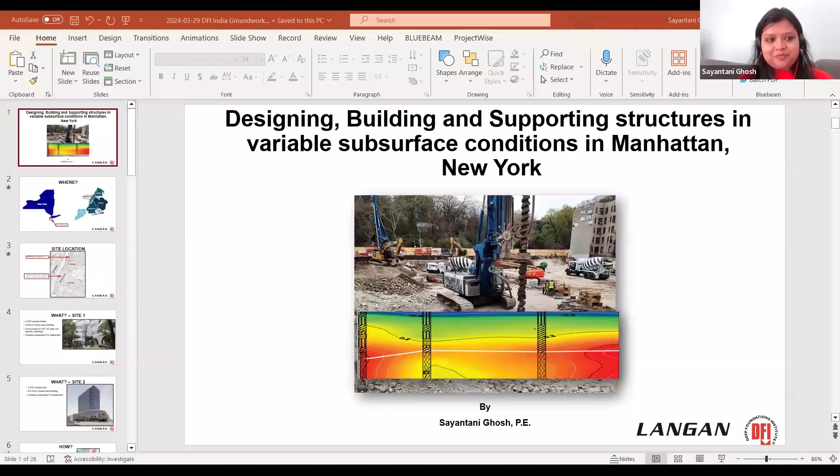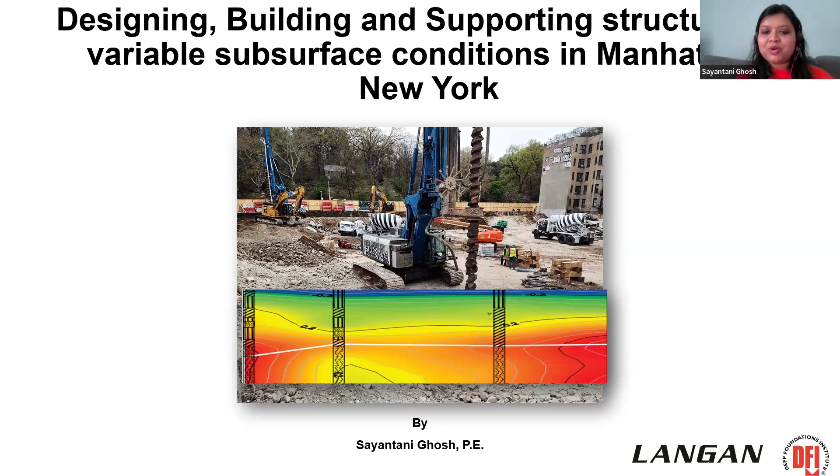We're going to talk today a bit about constructing and supporting structures in the variable subsurface conditions in Manhattan, New York. One of the things we usually hear a lot as geotechnical engineers whenever we talk to clients or developers is, you are in one city for such a long time, so how come you don't know the subsurface conditions? So part of today's discussion will be about how important it is to understand the subsurface conditions of a particular job site, to appropriately design and also work with contractors to have a successful project.

So we're going to talk about two of the projects in New York City, which is one of the cities in New York State. There's a lot of confusion sometimes that New York is a huge state, and New York City is just one of the cities in the state. New York City is divided into 5 boroughs: Manhattan, Bronx, Queens, Brooklyn, and Staten Island.

Moving on to Manhattan, many of you would probably be aware of Central Park. The site American Museum of Natural History, Gilder Center, is right next to Central Park in Manhattan. The other site that we worked on was Uptown Manhattan, at 4650 Broadway.

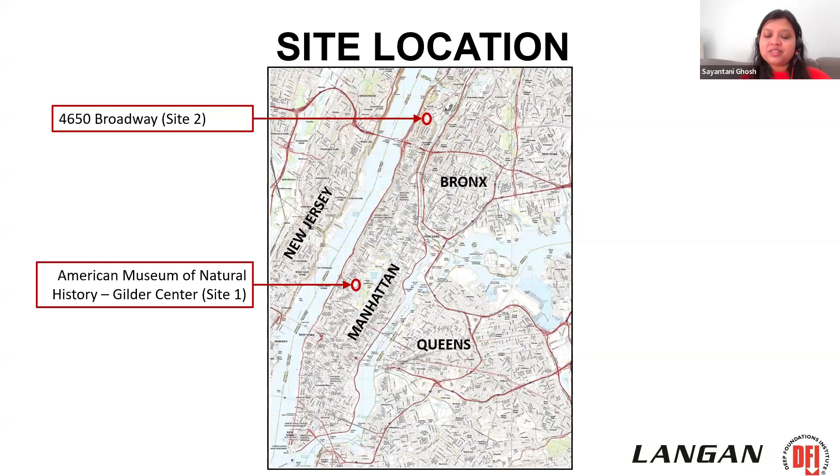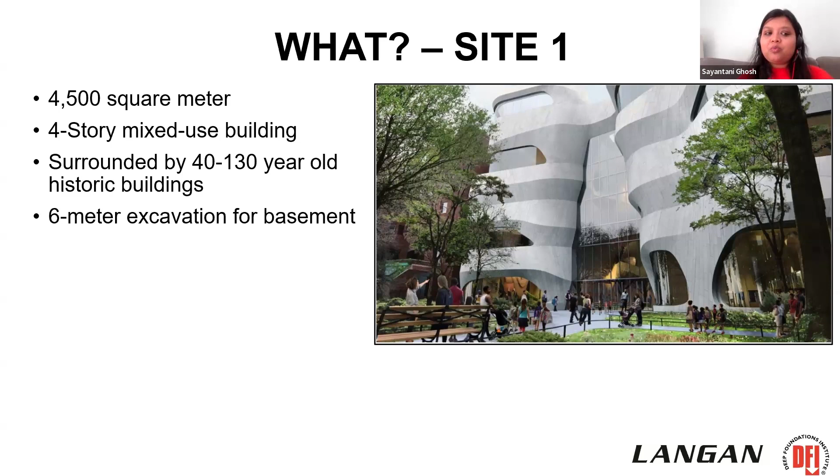So what are we building? Taking a step back from any name of the project or where it is: for site 1, it's a 4,500 square meter site, a 4-story mixed-use building. It's surrounded by 40 to 130-year-old historic buildings. It involved 6-meter excavation for the basement construction.

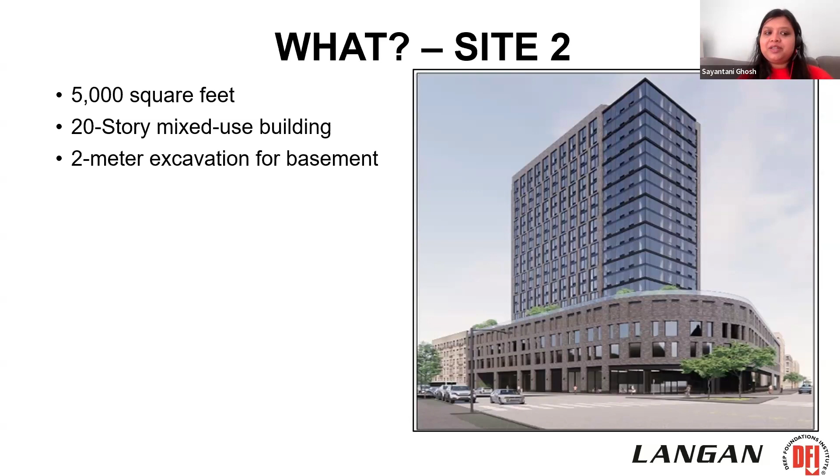Second site is 5,000 square meter—apologies, it's still in feet, so apologies about that because we're coming from the US to presenting in India, so this is meant to be meters. It's a 20-story mixed-use building with a 2-meter excavation for the basement.

So how do we get there? How do we achieve the goals of the projects? Wherever the site is, irrespective of the location, we would usually take a step back and try to understand what are the available geology maps in the region.

What are the historic maps saying about the history of a region? What was on site in the past? The local authorities are very critical—they play a very important part in the success of a project because they hold the information of these historic maps, what local compliance issues have to be followed, what code compliance needs to be followed, what approvals are needed. So the local authorities need to be on board to move ahead on the project.

What existing geotechnical investigation reports are available for the job site or in its vicinity? What information is available for the adjacent structures, like how tall are the buildings, what is the depth of the foundation, how many levels of basements are there, and how close are they to our job site?

Site visits, they are the most important according to me. It's very, very important to have site visits very early on a project to understand the locality, the region, the site grades. It's absolutely critical for the project.

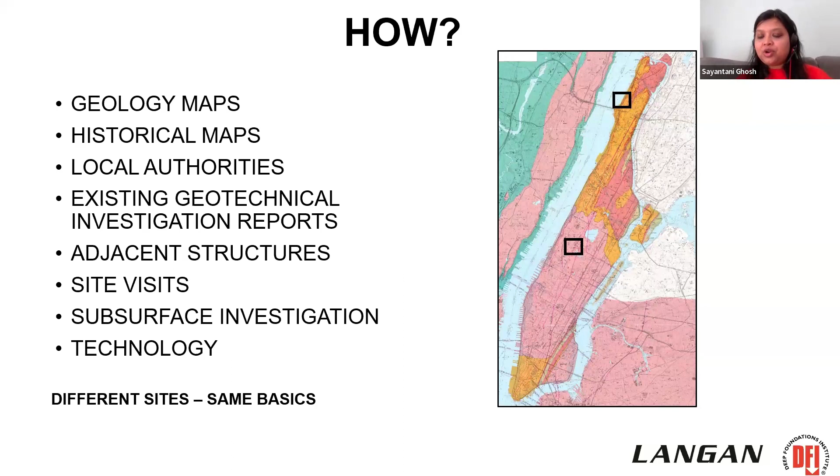Now I'd like to go a bit project-specific on the Gilder Center, which I'm referring to as site 1 for simplicity right now. The most critical part of this job was that it's a landmark site in a historic district. It was surrounded by buildings built ranging from 1877 to 1929. These were really, really old buildings with very old foundations, and there was no way we could touch them.

There were very stringent restrictions on any sort of damage that could occur to these buildings. And I'd like to flag it's an operational museum, so for the entire time of construction, the museum was operational. There were visitors, guests, and ongoing shows, so it was a full-on operational museum along with an active construction site going on adjacent to it.

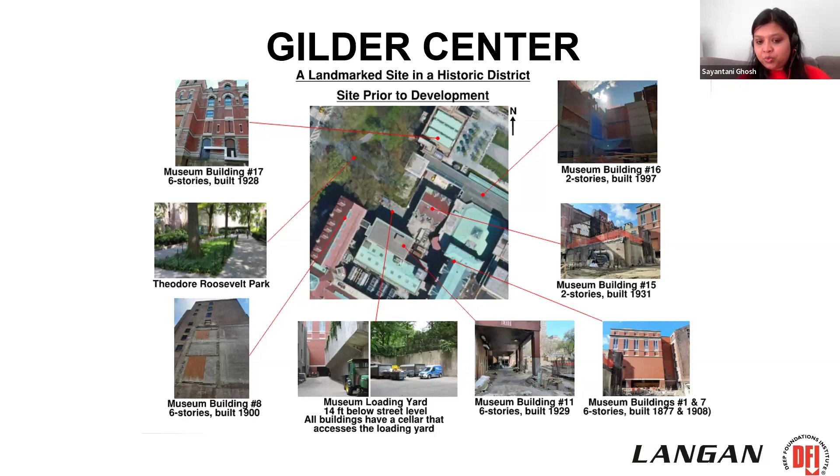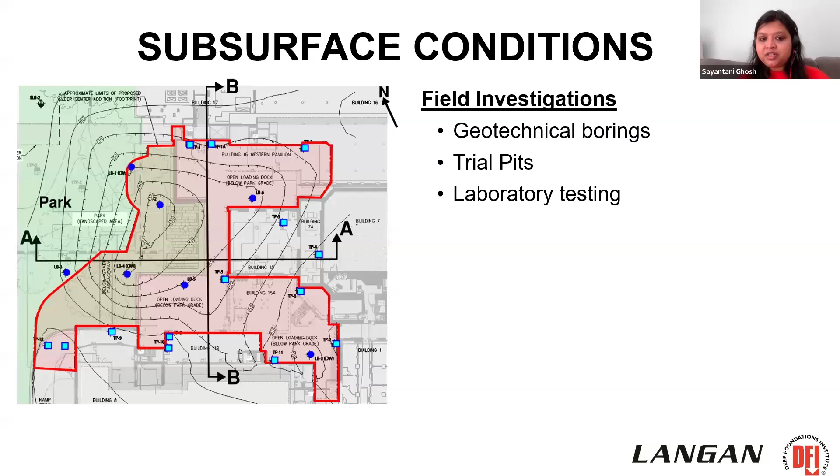So how did we start the project? We started with planning a field investigation, which comprised geotechnical borings, trial pits, and laboratory testing. Based on this project, we had all these adjacent structures, but unfortunately there was no information available from local agencies or any websites with building information where we could find the existing foundation of any of these buildings. So we prioritized trial pits on the job rather than doing tons of boreholes, because it was very important early on to understand the subsurface conditions where the existing footings are bearing.

A high level overview of the subsurface conditions on the east-west subsurface profile: we found that the site is underlain by fill, which was underlain by a clay zone, and underlain by a combination of competent bedrock, sand, and decomposed rock. So you can see it was highly variable. We could not state that the site is going to bear uniformly.

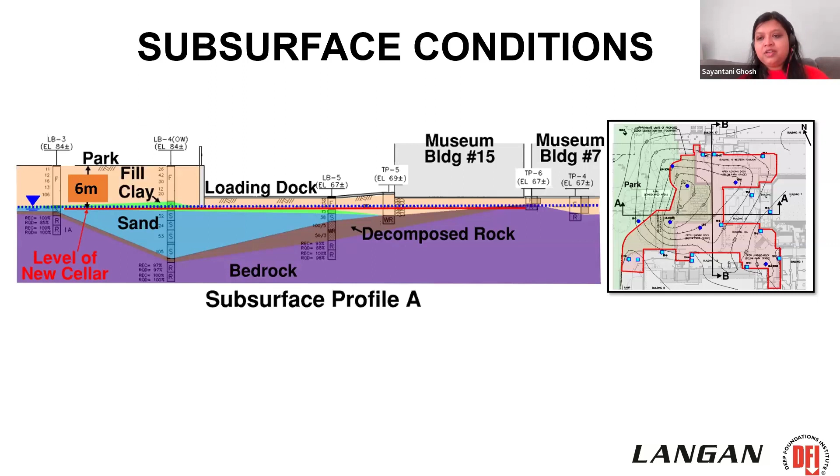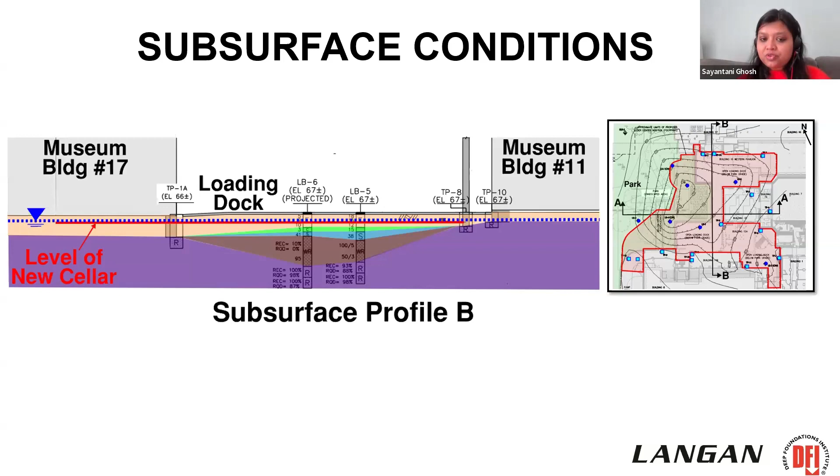The red line here shows the level of the proposed new cellar level, and that bearing level was going to range from competent bedrock to sand to decomposed rock. Moving on to the north-south subsurface profile, it was very similar. We understood that the existing foundations were going to bear on either decomposed rock or bedrock.

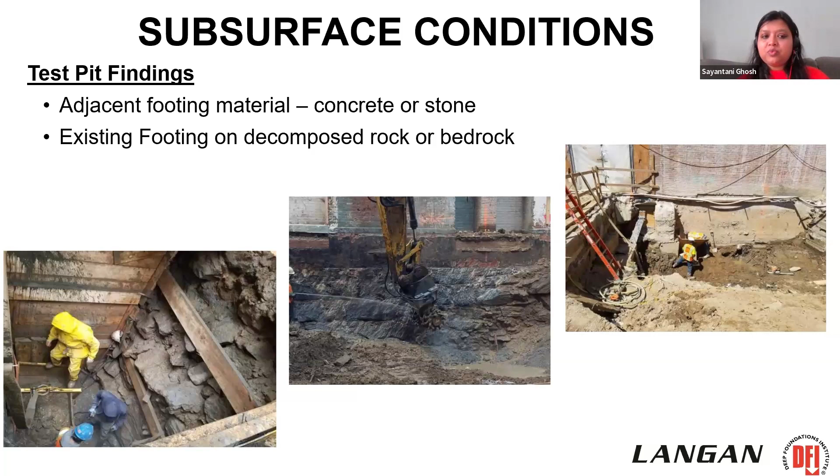These are a few pictures from our test pits while we were exposing the existing foundations. The adjacent footing material was either concrete or stone, and the existing footing, as I mentioned earlier, was bearing either on decomposed rock or on bedrock.

So the support of excavation was very, very critical on this job. Moving from the east side to the north of the site, the buildings on the north and east side were bearing on competent bedrock to borderline decomposed rock. We had to do concrete piers down 6 meters to bear the new foundations, which was done with the concrete piers onto competent bedrock.

As you can see, the blue zones are showing active utilities. These active utilities had to be underpinned and supported, and they were really very high intensity boilers. So a lot of safety procedures had to be put into place on site for the safety of the workers and engineers working alongside active utilities.

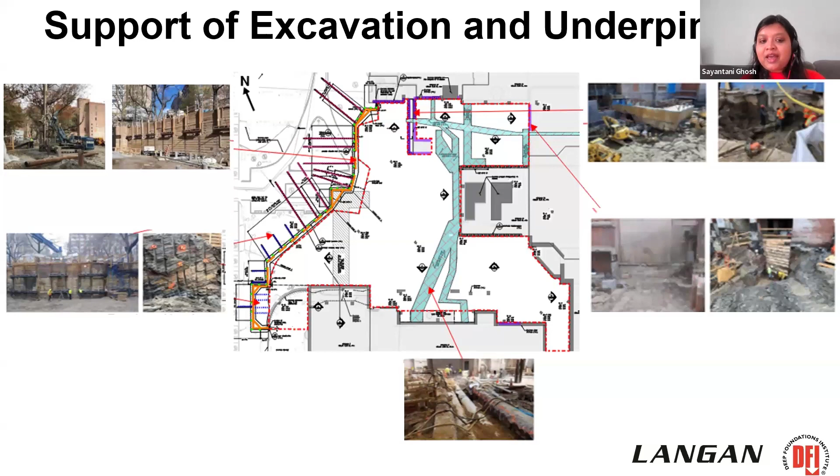If we move to the west side, we had a soldier pile and lagging system on varying subsurface conditions, because the southern part of the site had the rock level way higher than the northern part. So the level and tier of bracing were determined as we were excavating on site, moving from south to north, depending on where we were encountering bedrock.

The proposed new foundations were a combination of shallow and deep foundation. It had shallow footings bearing on either 4 TSF sand or 20 TSF bedrock, depending on the column loads received from the structural engineer. The deep foundations were caissons with sockets into bedrock.

The key considerations for the job, during both design and construction phases, were that we had to limit the differential settlement to a limit of 1/2 inch, and the total settlement and deflection was not allowed to exceed 1 inch.

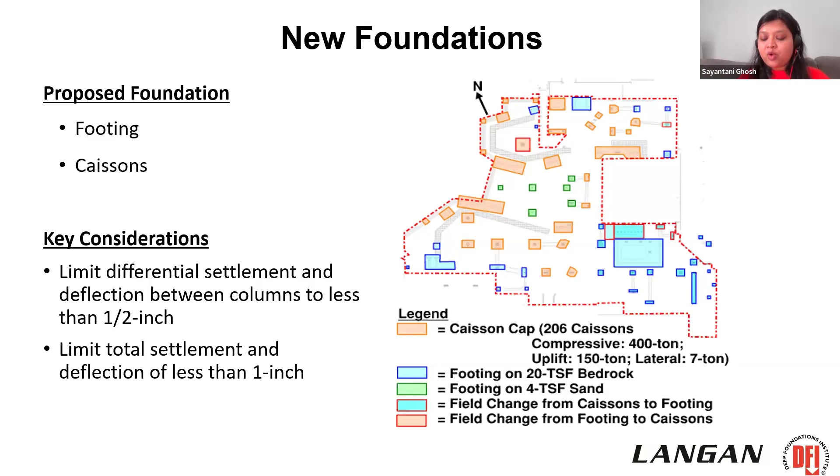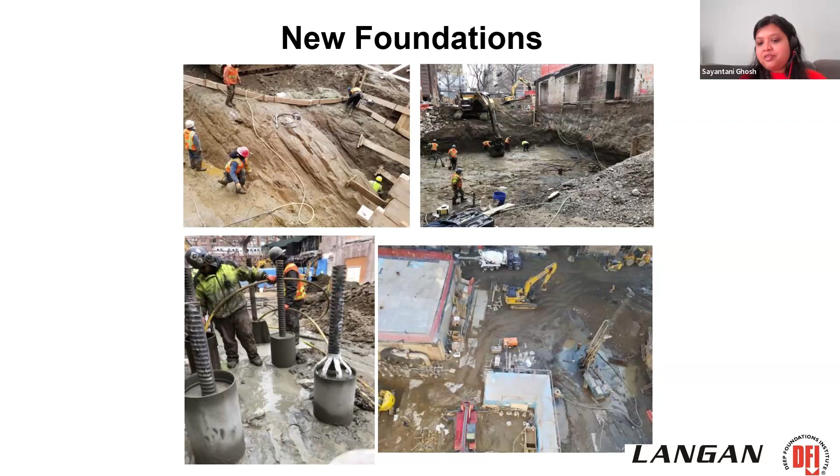On the other side of the site, parallelly, there were caissons being constructed. As you can see in the picture, it was an extremely active site with almost 5 or 6 different types of construction activities or drilling machines ongoing, with active utilities running as well.

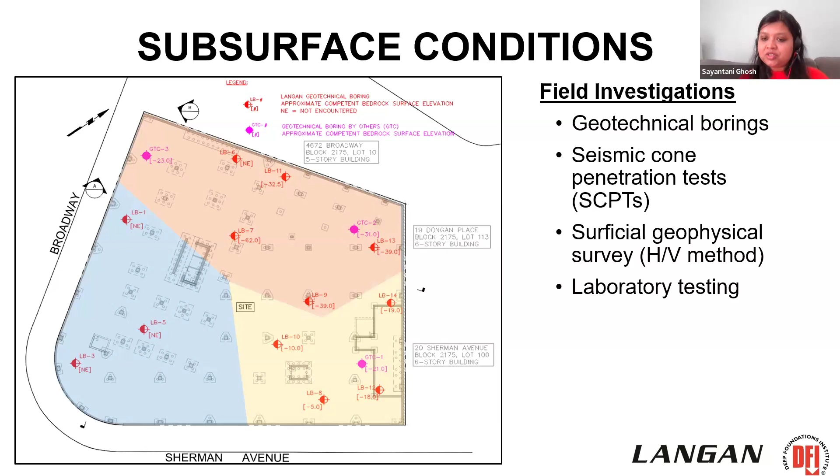Moving on to the second site, which is 4650 Broadway, the same principles of planning and very appropriate, tailor-made field investigation for the site, which comprised geotechnical boreholes, seismic cone penetration tests, a geophysical survey, and laboratory testing.

What we saw in the subsurface conditions here is we encountered a 20-meter thick overburden soil underlain by decomposed rock, which was underlain by competent bedrock.

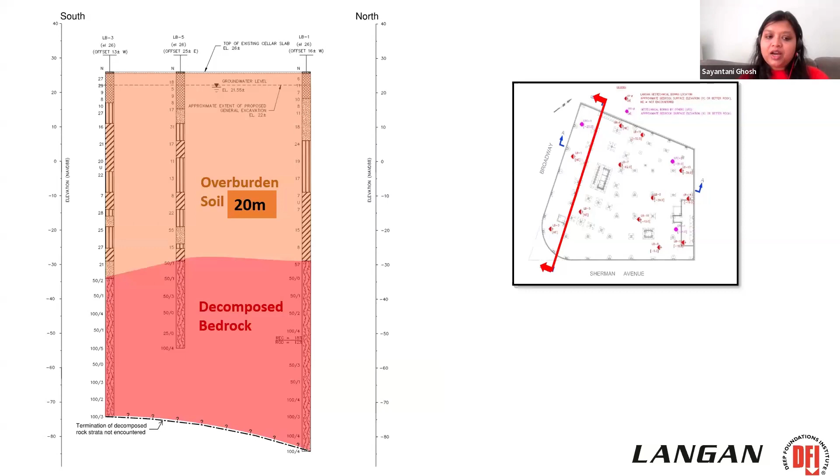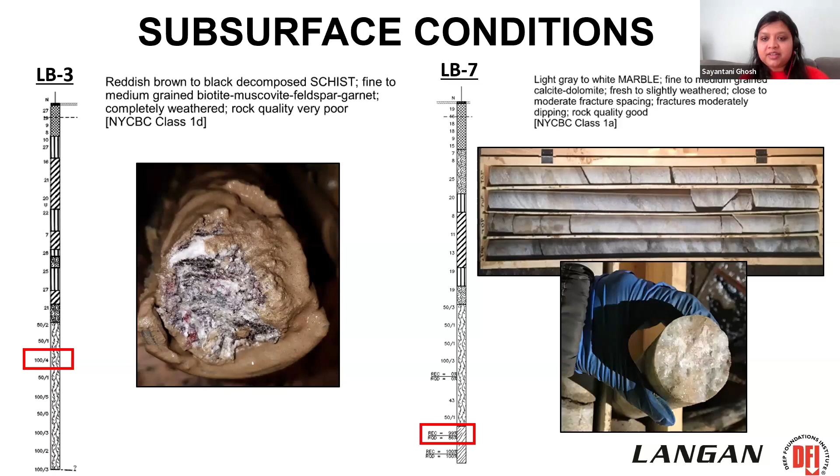Moving on to another section of the site, similarly we saw a 20-meter thick overburden soil underlain by decomposed bedrock. Some pictures of the different kind of rock - in one of the boreholes we saw decomposed schist.

However, on the other side, we saw white marble on site. So based on the loads that we had received, this was supposed to be getting inclined more towards a deep foundation design.

So what are the options of the deep foundations? Drilled piles, driven piles, CFAs - continuous flight auger piles, mini caissons.

When we were looking at the key considerations on the site, we had variable bedrock conditions, we had very thick overburden soil, and we had sensitive adjacent buildings next to the site.

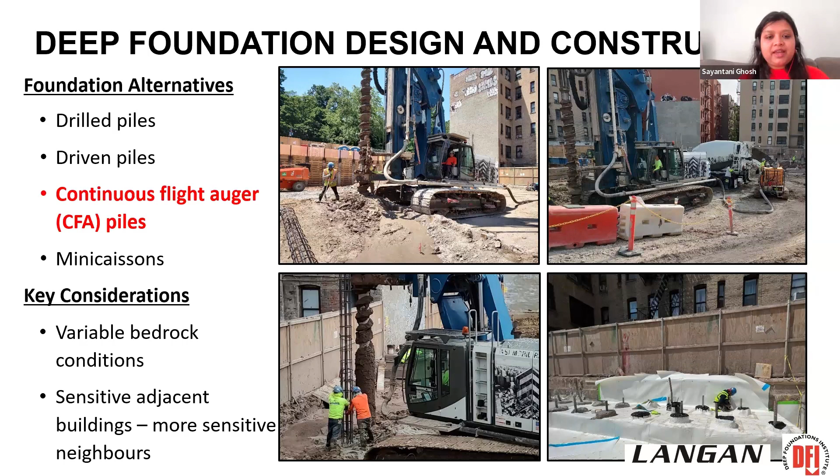However, this was a very sensitive locality with extremely sensitive neighbors who were not willing to accommodate any kind of disturbance due to sound at all in the area.

So when we looked at the initial design by Langan, we were looking into two different kinds of CFA piles with a combination of mini caissons.

However, the contractor was involved very early on the project, and they put a proposal forward that the contractor sees a potential cost saving and expediting the program of the site, by validating how much depth of the piles are determined based on load tests which will be conducted early on the project.

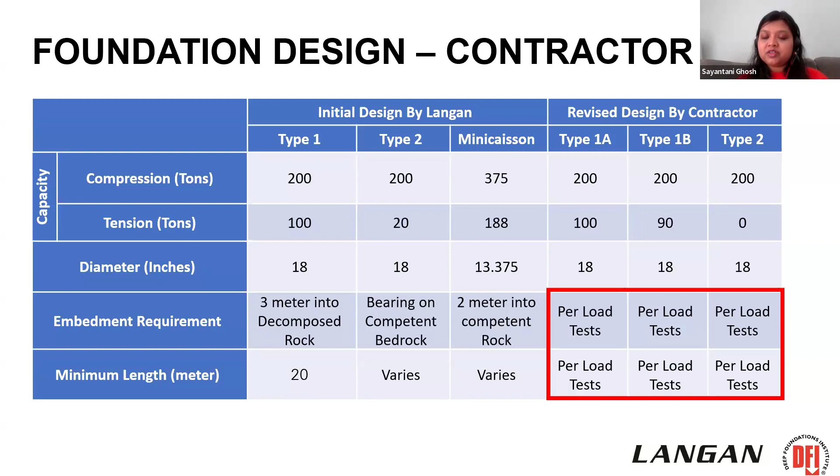So we were willing to work with the contractor on the project to develop the criteria. Instead of putting the criteria that we had thought, we were willing to work with the contractor to develop the criteria based on the load tests, based on the QA/QC process which our engineers would be following on site.

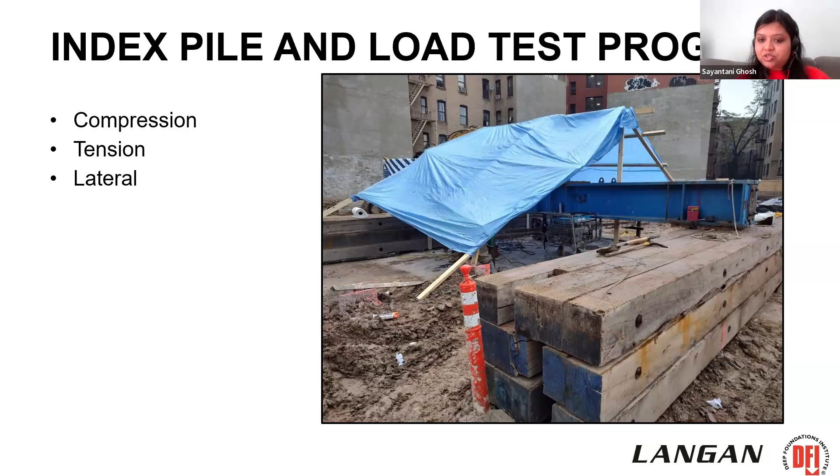So moving on, we performed compression load tests, tension load tests, lateral load tests on the job. What were the QA/QC processes implemented on site?

The CFA machines had automated monitoring equipment, which was documenting real-time grout volume, theoretical pile profile, drilling rate, grout pressure. Our engineers were on site constantly documenting all this information, while in parallel the office design team was running our numbers.

To come up with a parallel QA/QC process of putting in place a smell test - if the grout volumes are matching, if the pressures are appropriate for the kind of material we'd like to have the sockets going into.

And then we were going to validate these results with instrumented load tests to be able to come up with a very efficient QA/QC process on the job. We additionally performed some thermal integrity profiling tests, which documented the pile integrity, concrete quality, and the pile shape.

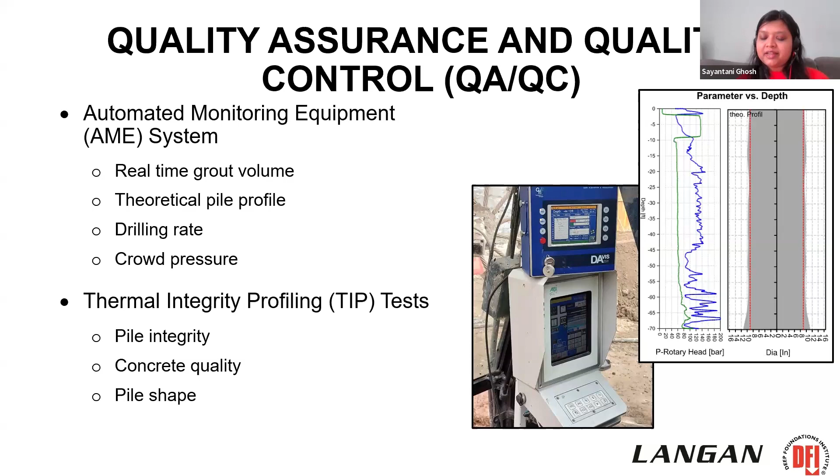So the conclusions for both sites: a very planned subsurface investigation in the initial phase of the project helps keep the project on the right track and avoid any significant surprises during construction. Any significant surprises during construction can have a very big impact on the cost and timeline of the project.

The key considerations, and having them fixed during the start of the project to develop as we go ahead, are important to come up with the appropriate design.

Team coordination of all the relevant parties - the client, developer, structural engineers, geotech engineers, the local authorities, the contractors, and anybody important in the project - needs to be constantly in touch and coordinated to avoid surprises between parties which lead to significant delays on the project.

Having an appropriate, applicable support of excavation design early on in the project, and having QA/QC implemented during construction of the support of excavation, is very important for safety in the region.